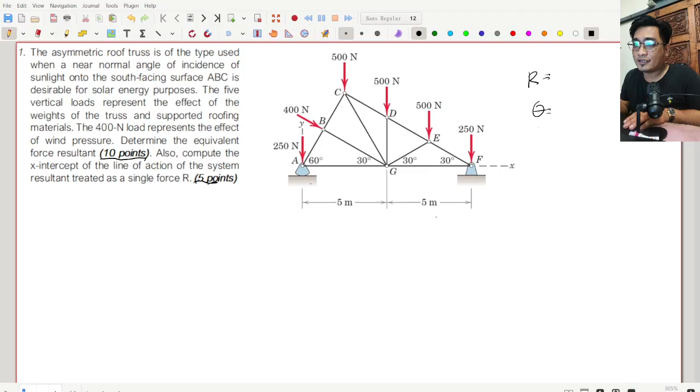Kasi yung pangatlong tanong niya, the location or where it intercepts the x-axis, or the x-intercept. So for example, assuming that the force passes through, let's say, this point, this distance here hanggang dito, will be your x-intercept, kasi that passes through the line of action. This is the x-axis, this is the x-axis.

So ibig sabihin, saan siya dito magpapasa? Let's say the reference point A, kasi yun yung y-axis, so A would be our point of origin. Okay? So at least now, again, treat a problem always as easy. You tackle a problem by first understanding what is required, yun lang naman. So after finding theta, alam mo na agad, masasagot mo na yung question number 1. So simulan na natin.

Kasi again, like I said, the formula for R is just equal to the summation of all the forces. Pero in this case, because our forces are directed differently from each other, hindi pwedeng isa lang kasi you cannot just add everything. So what we will do now is just basically do summation of forces, or do the components. So Rx would be the summation of all the forces along X. Tama? So gawin natin, instead of getting the resultant of this, you will get the components of everything, add it.

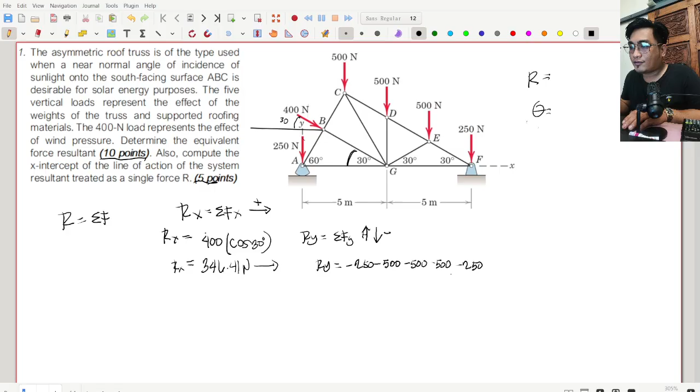Now for the 400, that's just as easy - 400. It's opposite, so sine, this is 30 degrees. So now Ry will be equal to 400 sine 30. That's negative too, since they're all going down.

Minus 250, minus 500, minus 500, minus 500, minus 250. That's equal to negative 2,200 Newtons. So it's negative 2,200 Newton. Since it's negative, therefore it's going down.

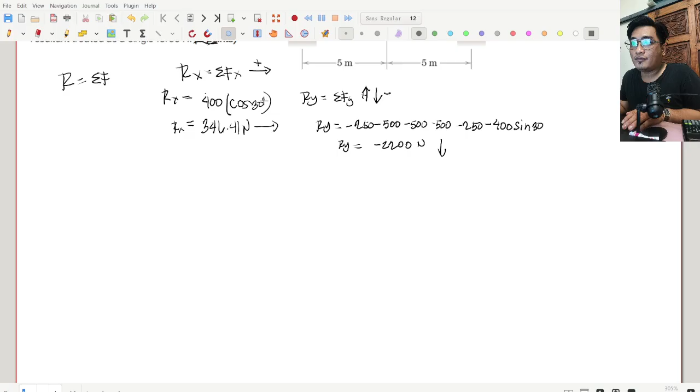We'll repeat the process here. Now I will draw a force here going to the right, then a force here going down. Let's scale it down a bit since the difference between them is quite large. Since I know that, I can now draw a parallelogram of these forces.

Since that's a parallelogram, I know that its diagonal would be the resultant. So this would be my Rx, this would be my Ry, and this will now be R.

Now R will be solved simply using the Pythagorean theorem, because if this is Ry, this must also be Ry. And this triangle here is a right triangle, and I can use the Pythagorean theorem since R is just the hypotenuse.

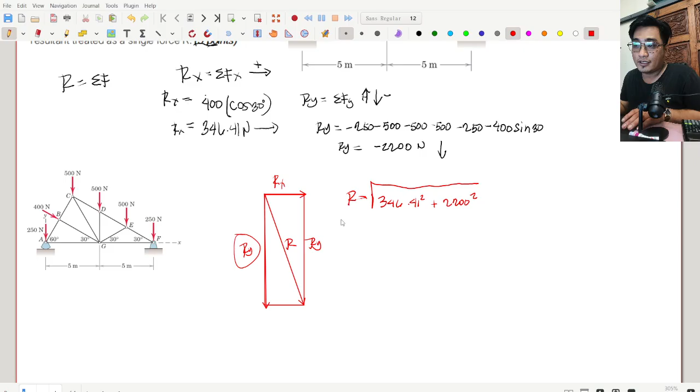Now R will be equal to - let's calculate - square root of the answer. This is 2,227.16 Newtons. So this is already the first part of the question.

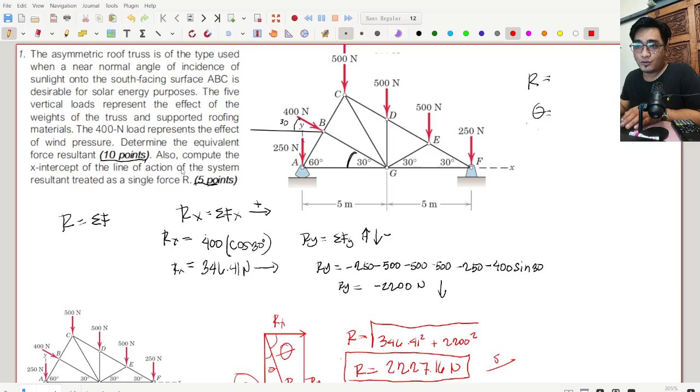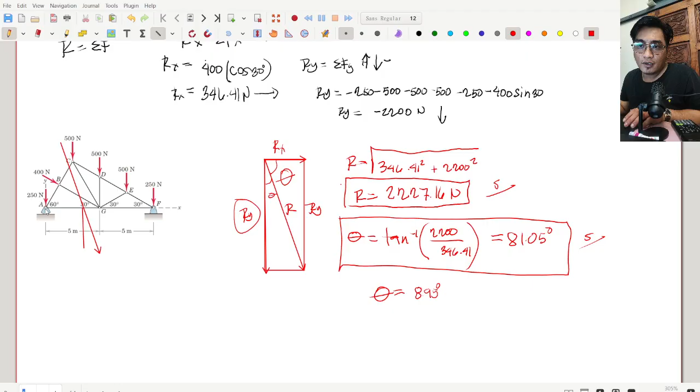So now, suppose this is my force, let's say this is my force. It would hit, let's say, I don't know, let's say here. So if it hits here, this distance here until this distance here, I will call X.

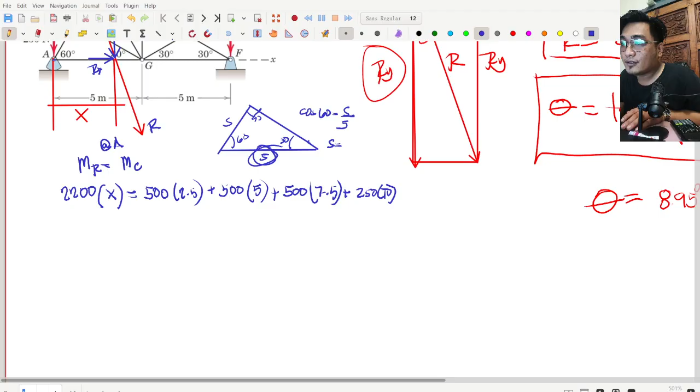So kung titignan mo to sa 60 degrees adjacent siya. So cosine 60 is equal to adjacent side S over hypotenuse. Hypotenuse is just 5. So S over 5. So ibig sabihin, S is just equal to cosine 60 times 5, and that is 2.5. So this is 2.5, ibig sabihin pala, etong distance na to, this distance here until here is 2.5.

Kasi bakit yun ang kailangan ko? Kasi nga perpendicular etong 400 sa AB, sa line AB, this one. So now, this distance is just the perpendicular distance of the force, and that perpendicular distance is your moment arm already. So now, ang rotation nito, clockwise pa din yan.

Okay, titignan natin, ayusin natin. This is plus 400 multiplied by 2.5. So now okay na, no? Makita mo naman dito, sa right side ng equation here, you all have values here.

Tapos dito, x lang yung unknown. So I can just use my calculator to solve for x. That's 500 times 2.5 plus 500 times 5, plus 500 times 7.5 plus 250 times 10 plus 400 times 2.5, divided by 2,200. And the answer for x is equal to 5.

So ang sagot, eto na. This is 5 meters. Answer. So ibig sabihin, ito palang force ko, dito siya dadaan mismo sa 5 meters. So dito siya mismo dadaan. Anyways, kahit di man drawing yun, nakalagay naman dyan. So this is additional 5 points, no? So yun na yun, mabilis lang.

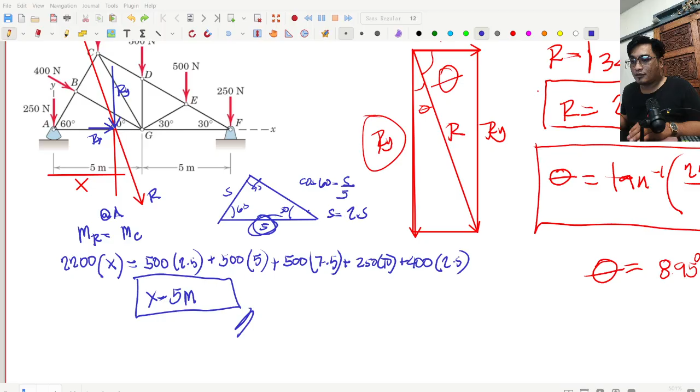Napunta na tayo sa problem number 2. Okay, so continue tayo, no? Saan na tayo? Wait lang. Okay, so problem number 2. Para bilis, problem number 2.

Where the given system of forces shown in the figure, determine the resultant force. That's number 1. Furthermore, compute the moment of the system about point A, considering clockwise rotation as positive.

Okay, ito naman pala, napakasimple lang, no? This could be, ito, like, magiging ko lang yung breakdown, no? Kasi 10 points, ayan, mga humingi ng partial. Sige, ito, 5 points. Tapos pag nakuha mo to, moment of system force, 5 points ulit yan. Okay, so that's all, total of 10 points.

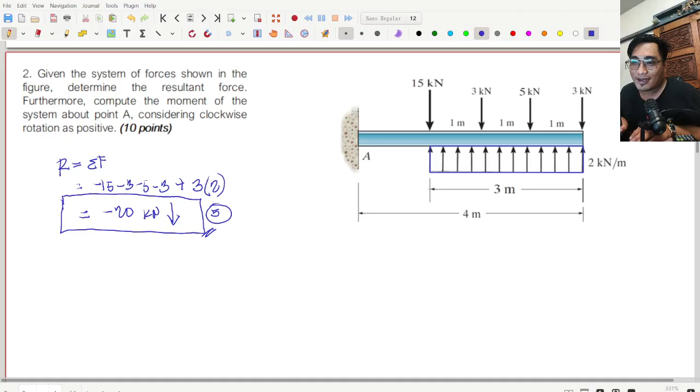Ayan, pag nakuha mo, that's 5 points. Mahirap ba? Wala. Ngayon, kung nakuha mo na yung 20, by the way, pag wala kang kilonewton, wala kang units, minus 2. Pag wala kang direction, again, -2. So make sure that you always use or you always indicate, especially the unit and pag vector unit, kailangan may direction. Yung -20 nasabi naman na kaya that's why it's negative, that's why it's going downwards or your negative direction.

Ayun. Doon naman tayo sa pangalawang tanong. Determine the moment of the system about point A. Okay, no. So ngayon, moment, moment about point A daw yung kailangan.

So ngayon, ano ba yung moment ng point A? So ibig sabihin kung anong moment nilang lahat dito sa point na to, sa pinakadulo, that's point A. So moment ng 15 plus moment ng 3 plus moment ng 5 plus moment ng 3 plus moment ng distributed load na 2 kilonewton per meter. Ngayon, puwede kong gawin yun, no, or puwede rin naman gamitin ko yung 20 kilonewton kasi this 20 kilonewton I know is located here.

So for this 20 kilonewton located here, I'll multiply it by its moment arm. The problem is I don't have the exact moment arm computed yet, but that's not part of the question. So I have a choice: compute this location, or just get the moment of all the components. I won't need to, because I know the moment of the resultant is equal to the moment of the components. The question only asks for the moment, so I can use either the moment of the resultant or the moment of the components. So here, moment of the components.

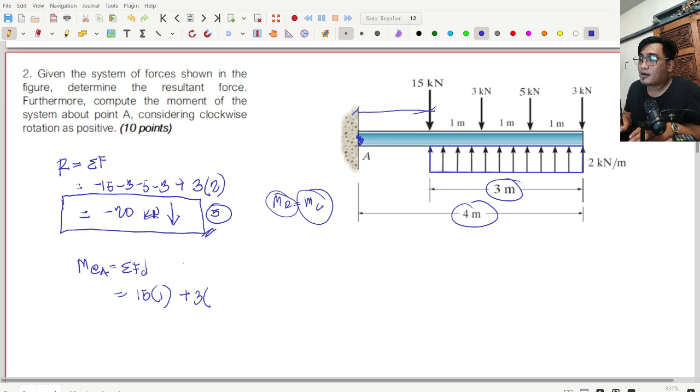This would be the summation of forces multiplied by the distances. So this is 15, taken at point A. This distance is 4 meters minus 3, that's 1 meter. Direction is clockwise, so that's positive 15, plus 3, also positive. This one, 5 is also positive, clockwise. This 3 is also positive. So three positive forces: 3 kilonewton multiplied by 2 (since 1 plus 1 is 2), plus 5 kilonewton multiplied by 3, plus 3 kilonewton multiplied by 4.

Now let's go to the 2 kilonewtons. For the 2 kilonewtons, I'll get the resultant of that distributed force. So that's 3 times 2. What's 3 times 2? 6. So that's 6 kilonewtons. Instead of using the distributed force, I will just use the 6 kilonewtons.

It says 3 meters is the base. As I mentioned when we discussed distributed force, the resultant is always at the centroid of the area. Since this is a rectangle, the centroid is always at the middle. So it's at the middle of 3, and half of 3 is 1.5. If this is 1.5, the distance from A would be 4 minus 1.5, that's 2.5. So instead of using the 2 kilonewton per meter, I'll use 6 kilonewton located at the middle. That's the concept of resultant, or the concept of distributed force.

The rotation is counterclockwise, right? Because it rotates this way. So that's counterclockwise, so it's minus 6, since 3 times 2 times the moment arm, 2.5. Let's compute: 15 plus 3 times 2 plus 5 times 3 plus 3 times 4 minus 6 times 2.5. That gives 33. So here, 33 kilonewton-meter. I got a positive value, meaning it's clockwise.

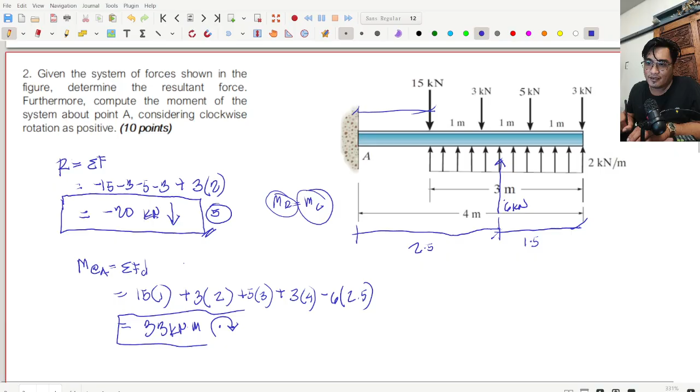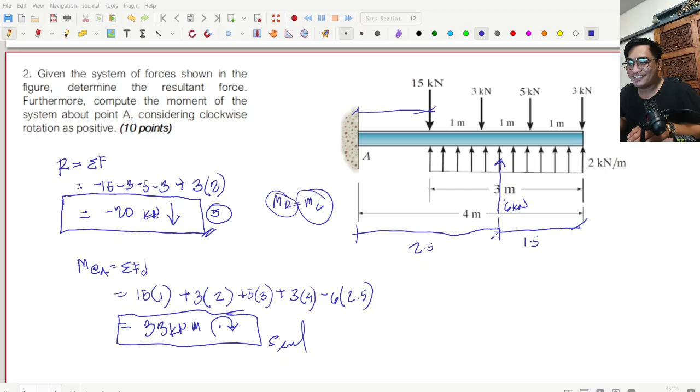Okay, so that's number 2. Now number 3. It says, from the given set of systems shown, here's the set of forces. Which of the following gives the resultant of the force system? Which gives the angle of the resultant with the horizontal? Then, compute the horizontal distance from the origin where the resultant intersects the x-axis. So, where along this x-axis does it intersect? Okay, let's begin.

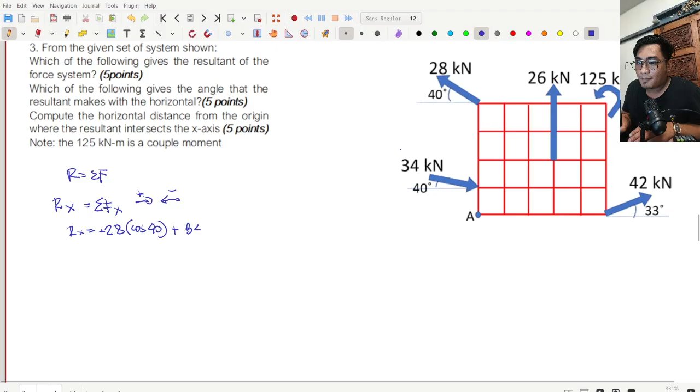So now, Rx would be equal to... let's go one by one, starting with 28. The x component of 28 is directed to the left, so it's negative, since my positive direction is to the right. So minus 28 cosine 40 - cosine because it's adjacent to the x-axis, which is what I'm solving for. Plus 34 cosine 40, again because 40 is adjacent. Plus 42... it might be covered again, let's see, no it's not covered yet.

Palitin nga natin yung mukha ko. 42.

Multiplied by cosine again kasi adjacent ulit siya sa horizontal. Cosine 33. Ngayon, 26. Alam mo na walang x component yan, so 0 na yan. Dito, plus 0.

Ngayon, ito, may bago na naman, 125. Sinabi dito na 125 is a couple moment. Okay, so ano ba yung couple? Pinag-usapan na natin yan. Couple is due to two forces that are parallel but opposite direction, same magnitude. So may magnitude to, may magnitude din to. Yun yung sinabi ko sa couple.

So ito daw ay isang couple moment. Itong dalawang force, by what we discussed dun sa couple force, these two forces here are parallel. They have the same magnitude. Ibig sabihin, pag kinuha ko yung resultant ng dalawang yan, ang resultant niyan ay 0. Pero meron niyang moment kasi, if you look at the forces, kaya niya pa rin pag-rotating. Magkukontra sila pagdating sa force, pero sa rotation, tutulong sila. Magtutulungan silang paikutin yung isang object. Kaya siya ganito yung drawing, pero it is still the same as this.

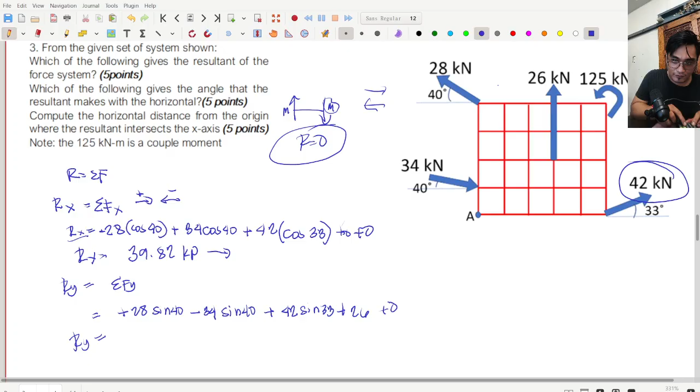Ry will be equal to 28 sine 40 minus 34 sine 40 plus 42 sine 33 plus 26 plus 0, which is 45.02 kilonewton. Positive yung nakuha mo, so ibig sabihin going up.

Okay, now kung nakuha mo na yan, all you need to do now is to get the whole resultant, the actual resultant. So meron kang 45, tapos meron kang 39. Again, yung resultant niya is just when you draw a parallelogram from this, so magiging rectangle siya.

Vertical ulit, this line here would be my result. Okay, itong resultant ko, wait lang, bakit di pala nagre-record? Check ko lang. Now, this length here is my x, which is 39.82, tapos ito would be 45.02. So R will be equal to square root of

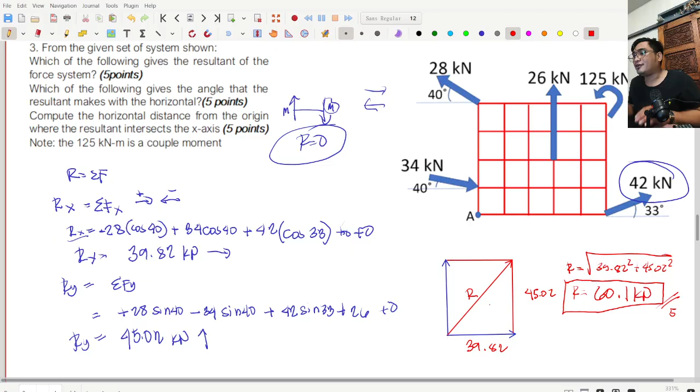Now next, ito naman, sabi niya angle. Pangalawang tanong, angle, what's the angle daw? Ngayon, sabi niya, you need to use the angle with the horizontal. So now, if it's with the horizontal, you're required to solve for this theta. Yan lang ang theta na tatanggapin ko. Yung theta na yan is with the horizontal.

So this theta here is just equal to tangent inverse of opposite, which is 45.02, over the adjacent, which is the 39.82. So this is equal to 45.02 divided by 39.82. Tangent inverse ng answer, that is 48.51 degrees. So this is north of east. Okay, 5 points, diba? Dali, diba?

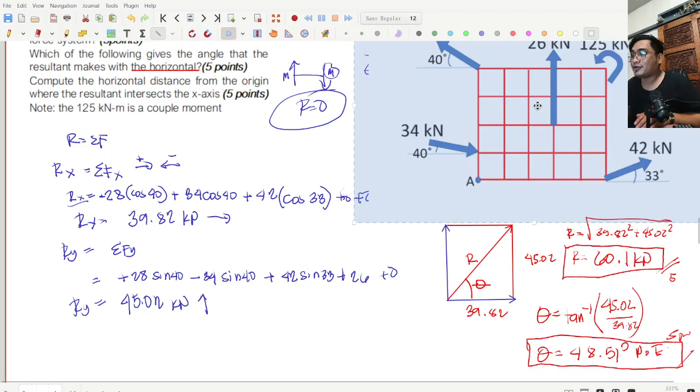5 points. Ngayon, last, to compute the horizontal distance from the origin. Okay, so wait lang, let me just copy this. Copy natin, tapos paste natin dito para makita. So ngayon, ito daw resultant ko. Wait lang, okay, itong resultant ko na to, kasi palakihin ko lang siya. Yan, same lang naman siya.

Itong resultant ko na 'to, hindi ko alam kung saan nag-a-act. Puwede dito, puwede diyan, puwede dito, puwede diyan. Ang tanong niya para malaman yung location, i-indicate daw natin kung saan siya nagpa-pass dito sa axis na 'to, sa x-axis. So let's say assumption natin, dito. So now, if I assume that the force, this resultant force here, R, passes through that, itong distance na 'to, hanggang distance na 'to, tatawagin kong x.

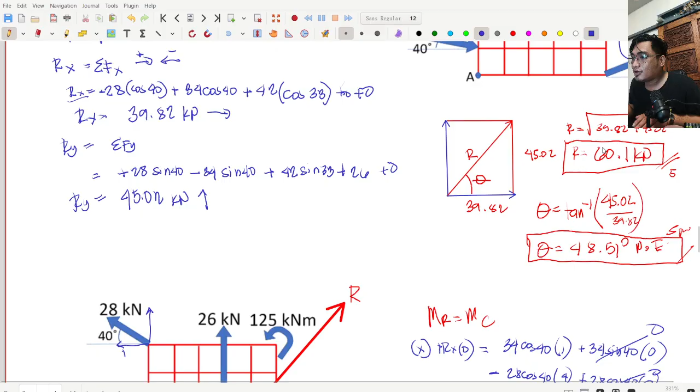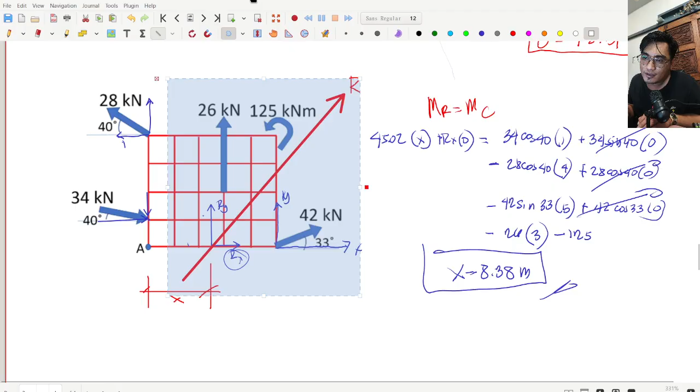Okay, so ibig sabihin pala, wala siya dyan sa 8 meters, siguro nandito daw siya. Pero wala namang problema, assumption lang naman yan. Pero totoong sagot, totoong location niya, siguro nandito, kasi from this, 1,2,3,4,5,6,7,8 meters pala siya. So lagay ko lang doon para at least yan pa rin yung assumption mo, X pa rin yan. Pag nakuha mo to, this is another 5 points.

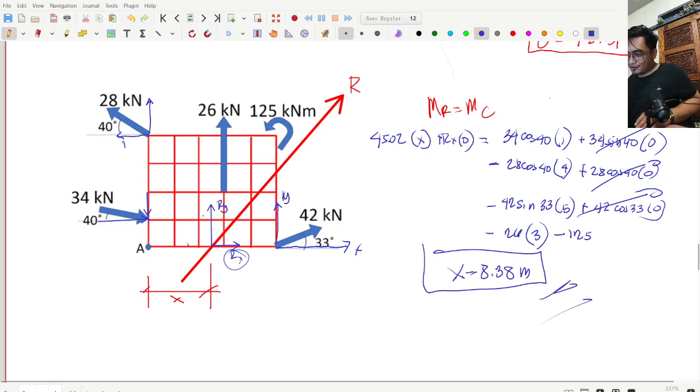Tapos, dali, next, last. Ilang oras na ba tayo? 47 minutes of 1 hour. May explanation pa. Determine the magnitude and the direction, gulo na ng buhok ko.

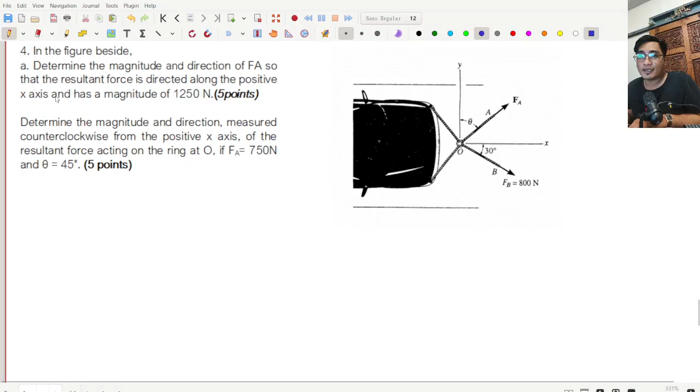Sabi niya dito, determine the magnitude and the direction ng FA. FA is ito, F sub A or FA. Ano daw yung direction ng force na yan? So that the resultant force is directed along the positive x-axis and has a magnitude of 1,250 Newton.

So for letter A, na problem, alam ko na ang aking resultant given na, no? Ang given ng resultant, since ang resultant mo daw dapat is equal to 1,250 Newton. Tapos it is also directed daw, given na directed along the right. So ito siya, yan yung direction tsaka yung magnitude ng R mo. So ibig sabihin, kung alam mo yan, alam mo na rin dapat na RY mo, 0. Ang RX mo, buong 1,250 kasi buong resultant mo is along the horizontal. So by using this, alam ko din dapat na

RY is just equal to summation of all the forces along Y. So Ry is equal to 0. This is equal to, dito naman tayo, summation of all the forces. So Fa, ito yung theta ko. So that means Fa sine, sorry, cosine kasi adjacent pala, ito ang y-axis mo, adjacent siya. So cosine theta, positive yun.

So minus 800 sine 30. Computing 800 sine 30, that is 400. Ibig sabihin, FA cosine theta is equal to positive 800, sorry, is equal to 400, kasi ito equal to 400 yan. Ngayon bakit naging positive? Kasi nilipat ko siya, andun yung equal sign. Okay, tabi ko na lang muna yan kasi wala akong mapala, pwede ko pang ayusin. Let's say FA is equal to 400 over cosine theta.

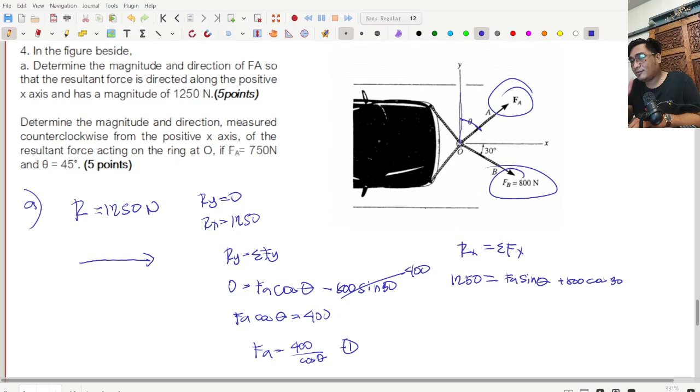Actually, halos ganito yung example natin. Mayroon tayong ganitong, hindi naman sa ito mismo, pero meron tayong equation, meron tayong sample, meron tayong example na parang ganito yung flow ng solution niya. So 800 cosine 30, 1,250 minus 800 cosine 30.

Isin ko na lang, no? So ito magiging FA sine theta is equal to 1,250 minus, dinalipat ko siya sa kabila, 800 cosine 30 degrees. So now FA sine theta is equal to 1,250 minus 800 cosine 30, that is 557.18. Okay.

Now I have two equations, two unknowns. I know that FA is equal to 400 over cosine theta. I can substitute this FA here. So ibig sabihin, by substitution, I will get that sine theta multiplied by 400 over cosine theta. Kasi FA is just equal to 400 over cosine theta. So sine theta, ito, sine theta na-retain yan. So FA is equal to 400 over cosine theta, substitution lang yan, algebra, is equal to

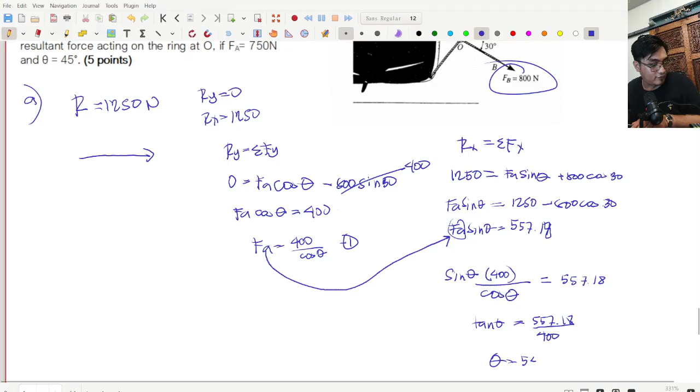557.18. At alam ko din na ang sine theta over cosine theta is just equal to tangent theta, kasi sine over cosine is tangent. So is equal to 557.18 all over 400. Okay, ito na, okay. But, 557.18, and shift tangent inverse, the answer that will give me 54.33 degrees. So theta is equal to 54.33 degrees.

This is 54.33 degrees, so this actually answers it. Now, since that's theta, I need to get FA too. So for FA, let me use this equation: FA equals 400 over cosine theta.

Which is 54.33. So FA will equal 400 over cosine of the answer, which equals 685.89. So FA equals 685.89, the answer. Okay, once you get these two, that's 5 points.

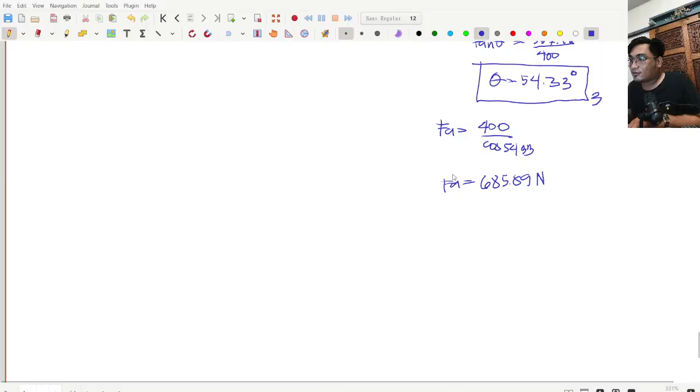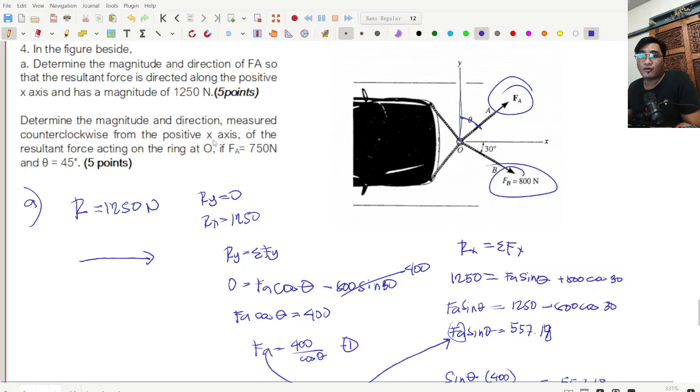Answer. Okay, number two: Determine the magnitude and direction, measured counterclockwise from the positive x-axis, of the resultant force acting on the ring at O, if FA equals 750 and theta equals 45.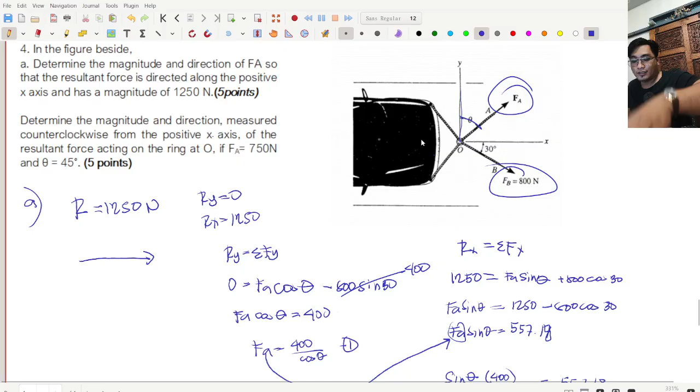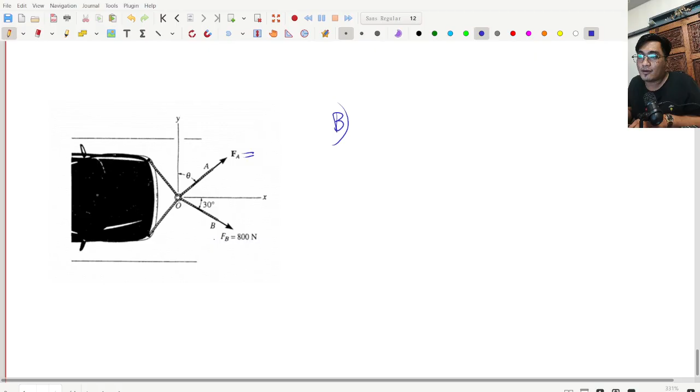Okay, wait, let me copy this and bring it down here. Now, the problem says in letter B, your FA is given as 750, and your theta is 45. So FA is 750, and theta is 45 degrees.

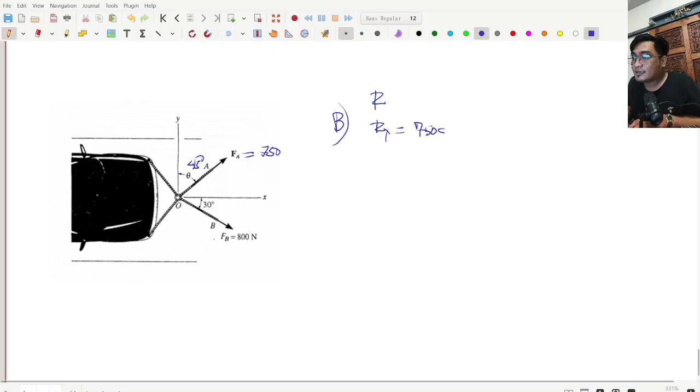So now this is very basic. When you need to get R, first get RX, then get RY. So RX first: RX will simply equal 750 sine 45, repeating, plus 800 cosine 30.

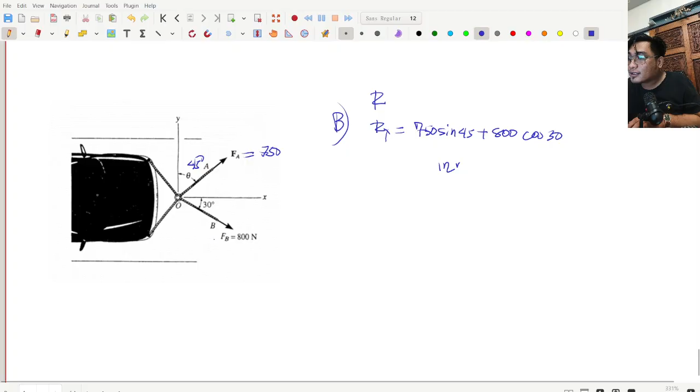So 750 sine 45 plus 800 cosine 30, and that is 1,200... 1,223.15 Newtons. This is Rx.

130.33 Newtons. So the answer is positive, meaning going up. And this one, the answer is going to the right since it's positive. So 1223.15 squared plus 130.33 squared, square root of the answer is 1230.07. So R will equal 1,230.07 Newtons, that's the resultant. This is already 3 points.

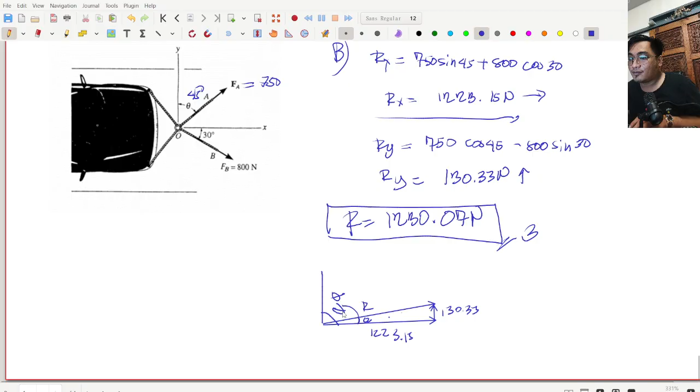So now, what is theta? Why this one? Because this theta, this angle here, that should be my theta. It can't be the other one. Why? Because the problem says the theta needed is counterclockwise from the positive x-axis. So that means, from the positive x-axis...

That's your axis, that's your x-axis. From this point, if this is your resultant, here, from the positive x-axis, going counterclockwise, this is your theta. And that is just this theta, this one. Okay, now that theta can simply be solved using tangent inverse.

Tangent inverse, opposite, which is 130.33 over 1223.15. So theta equals... 130.33 all over 1223.15, shift tangent, answer 6.08 degrees.

Okay, 6.08 degrees, 6.08 degrees, done. Good, so that's a total of 5 points.